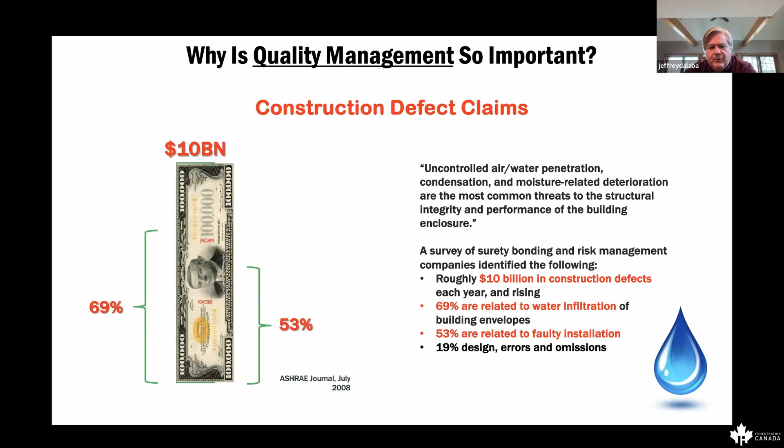The interesting thing is they tied 69% of those claims to water infiltration, and further broke that down to show 53% are related to faulty installations. Now, we're talking about the whole building envelope—above grade and below grade—so not all those water infiltration issues are specific to glazing. But it certainly points to the importance of glazing systems as a significant component of the building envelope.

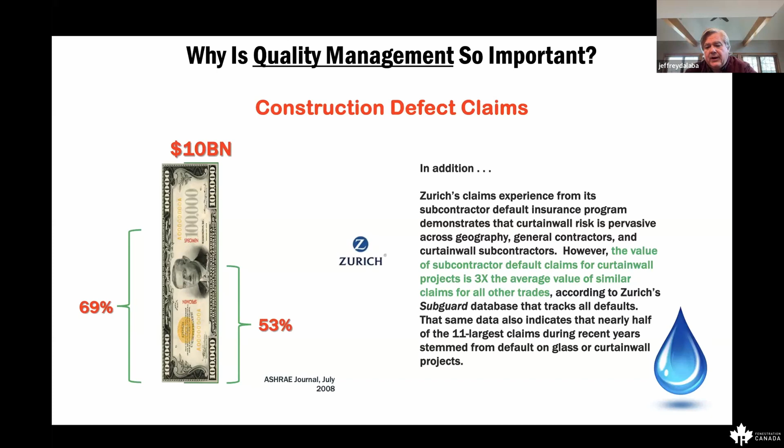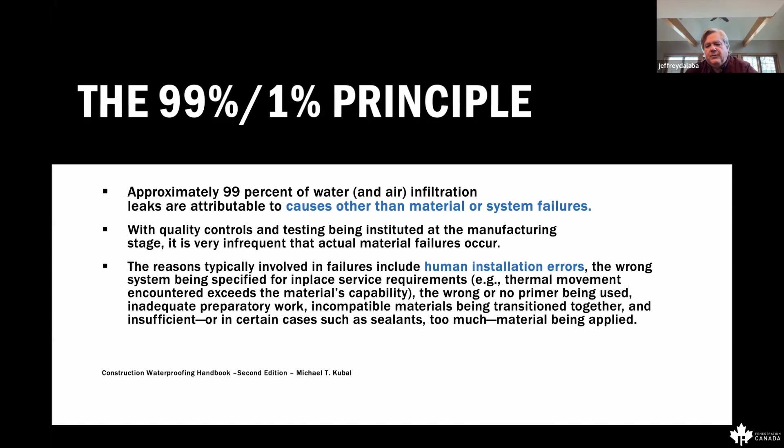So then we take a look at the waterproofing handbook, which is a handbook for building envelope as a whole and waterproofing. In the waterproofing manual, it talks about the 99%, 1% principle—approximately 99% of water infiltration leaks are attributable to causes other than material or system failures. Not to say a system won't fail, but it's more likely that human installation errors either cause or contribute to that failure than the system failing itself.

So what we've tried to drive towards through both certification of glaziers, but also evaluating entire glazing contractor firms, is to determine if there is a qualified installation team in place. In other words, to provide the best possible outcome on building envelope, there has to be a qualified team working on the project, from key management to estimators and project managers, to assembly and fabrication done in the shop, the way materials are handled, getting to the field, and final field installation.

To date, there really hasn't been significant verifiable qualifications to evaluate a contractor. So bringing in the NACC program along with AGMT has been a way to first set a standard for a qualified team, but also determine a means of evaluating them.

Going back to this again, we started with certifying products, and there's a lot of engineering and architectural testing that goes into any building envelope products. The next step, if you're going to try and control processes, is to look at the glazing subcontractor.

How do we look at the glazing subcontractor? We have to look at their process controls. Do they have qualified people following specific written processes that are industry best practices, and are they carrying them out? And then, of course, glazier competency.

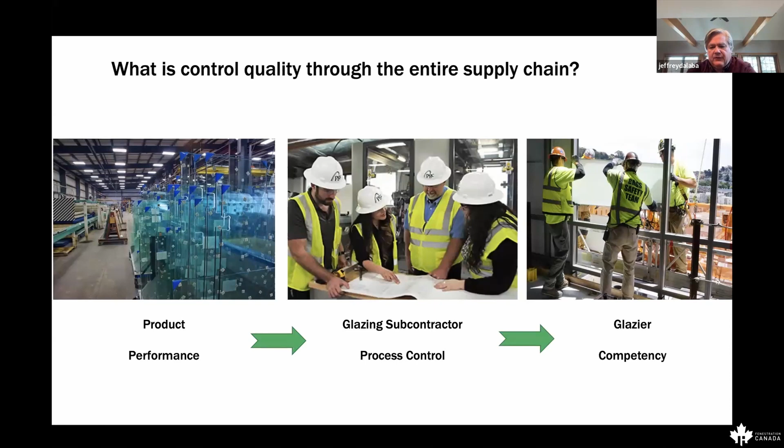Better building envelope relies on a lot of things. I know all of you on this call are involved in the industry and probably know these already, but it really drives towards minimizing air and moisture infiltration, making sure thermal isolation features are installed properly, adherence to solar shading and heat gain requirements, and durability of products like insulating glass, which can be affected by poor installation.

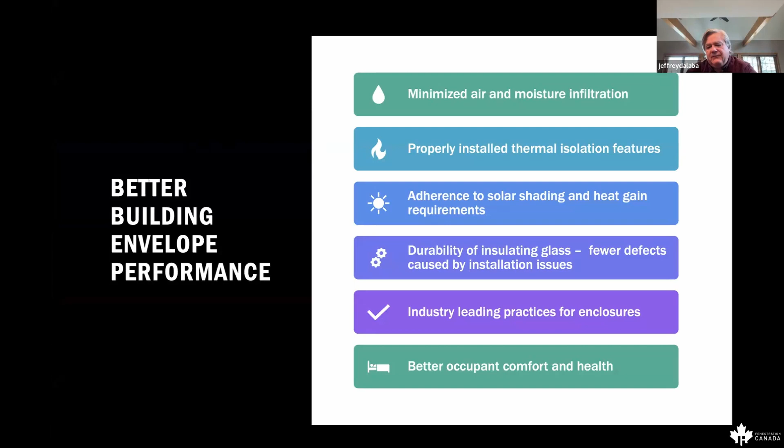It really drives towards industry-leading practices for enclosure and ultimately for general public safety and better occupant health and comfort. There are a lot of different reasons why a building envelope may not perform as expected: design flaws, construction defects, poor workmanship, installation failures, system and product failures, or repair and maintenance after installation that does not occur.

The other piece that has to be appreciated with building envelope, especially in metropolitan areas, is that a failed glazing system can be extremely costly and incredibly disruptive to occupants within the building to repair. If you have to take the skin off an entire floor of a building because it was installed incorrectly, or there was an issue with it, it's going to require moving out of the building, moving systems, and a lot of disruption to the company that's there.

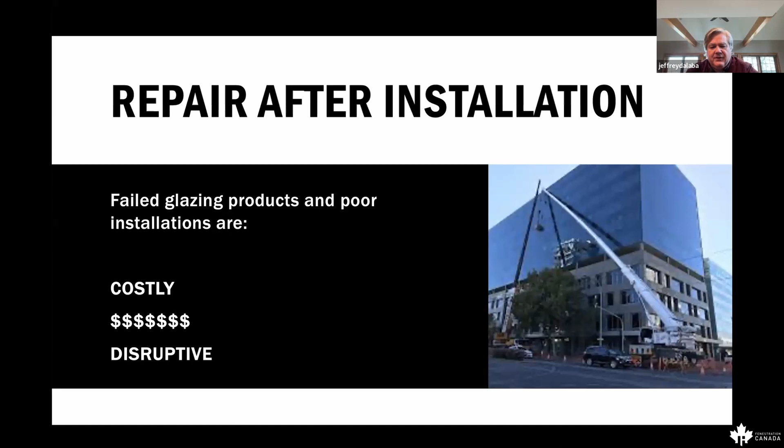So I think, to look at this a little more closely, I want to look at quality management systems and what that really means. A lot of times there's the thought process of, well, we check our work, or our superintendent looks at everything, so we have quality controls in place. But I want to expand on what we really mean by quality controls and what we're driving to through certification to ISO type systems. A definition of QMS, or quality management systems - I'm going to just read this.

A quality management system is a collection of business processes focused on consistently meeting customer requirements, enhancing their satisfaction through quality standards. It is aligned with an organization's purpose and strategic direction.

So I want to focus on that for a minute and say, what we're talking about is a company developing their systems with assistance through certification and through some of the direction of the requirements of certification and samples and examples that we provide. We don't go into a company and try to tell them how to do business, or try to completely and radically change the way that they do business. What we're looking for is for them to tighten up controls, tighten up written processes, tighten up the way that they conduct business and the way that fabrication and installation occurs.

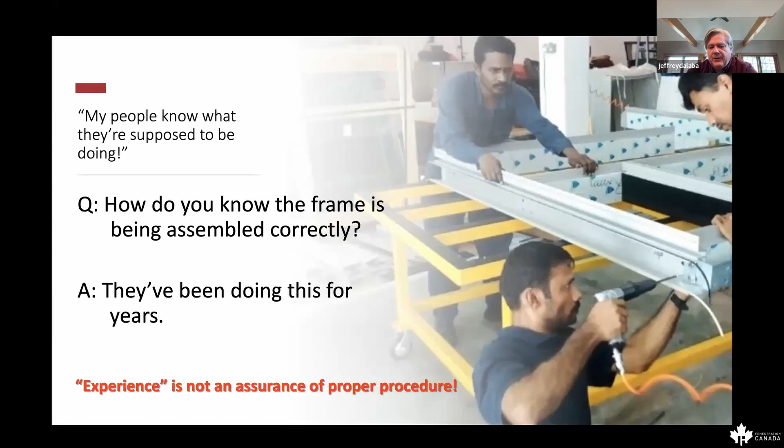Quality management systems isn't any one thing. The other thing we hear is, well, we have a quality manual. The quality manual may be sitting on the shelf collecting dust, and we certainly want to see that they have a quality manual, but it's not the most important piece. Having policies, procedures, processes, and verifications or quality checks are what bridge the gap and bring this all together. The quality manual sets the high-level processes to bring this all together.

But there's other pieces to it as well. When something doesn't go right, having corrective actions and preventative actions that are documented, looking for root causes so that things don't happen the same way twice. If something goes wrong, being able to correct it so it doesn't happen again. Of course, competent people and looking at what your customers are saying are important pieces of quality and need to be tied in. Having a quality manager that oversees the whole process and calibrated equipment - they're all pieces, they're all tied together through that quality manual, but there's a lot more to it. And that's why it's called a management system, not just a control.

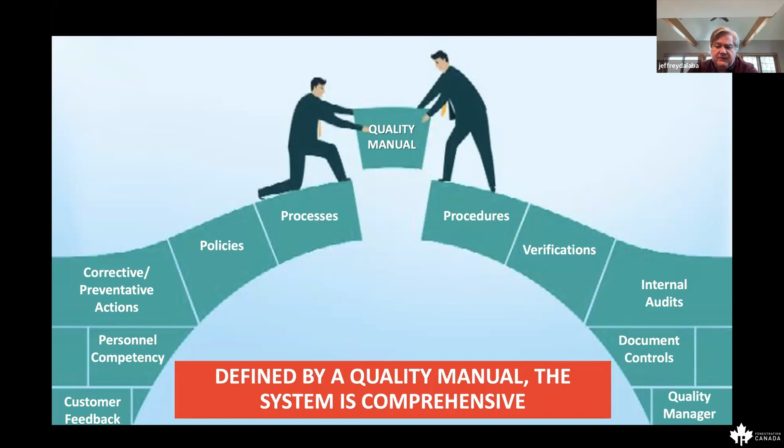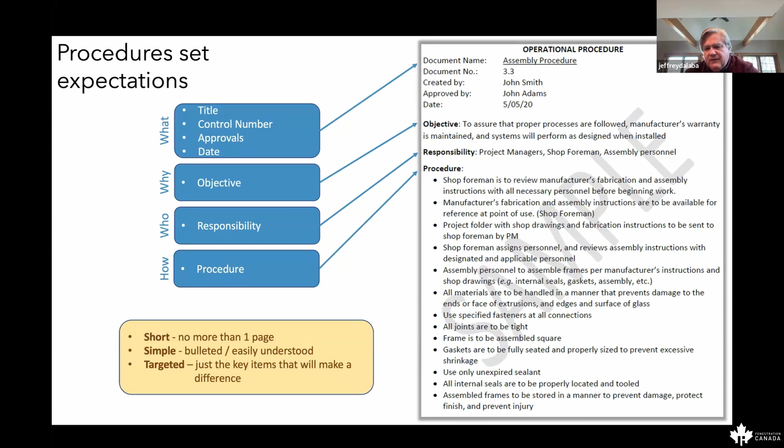We very strongly believe, as part of this certification, that you don't need 50-page procedures for most operations. Having a one-page procedure that covers at least the high-level points, and covers areas where something may go wrong or may not be done correctly, or a step might be missed - but covering those steps in a controlled process with a numbered document, with approvals and reviews of the document by management, is a way to start setting procedures for the organization. And this is just an example of what a procedure might look like.

Why is quality management systems so important? Well, this is an example here, and one of the things you may note very quickly is that the perimeter joint is tight, or there is basically no perimeter joint on this particular installation. We see this a lot of times. System manufacturers will tell you that 95% of field visits are necessitated by installers not following fabrication installation instructions. So if you look at this more closely, the bottom sill receptor is tight against the substrate with the top of the sill flashing.

There's no dynamic joint in there to allow for expansion and contraction. We see these kinds of things all the time. It's simply not following - there's two pieces to it. One is not being competent, and another piece is not following manufacturer's installation instructions that require a perimeter joint that's 3/8 of an inch in this particular instance. And that allows for the sealant to stretch and contract as well, especially important in northern areas where we get 80 or 90 degrees in the summertime and down to 0 degrees in the wintertime, or whatever. I guess I'm talking in Fahrenheit - I should clarify that.

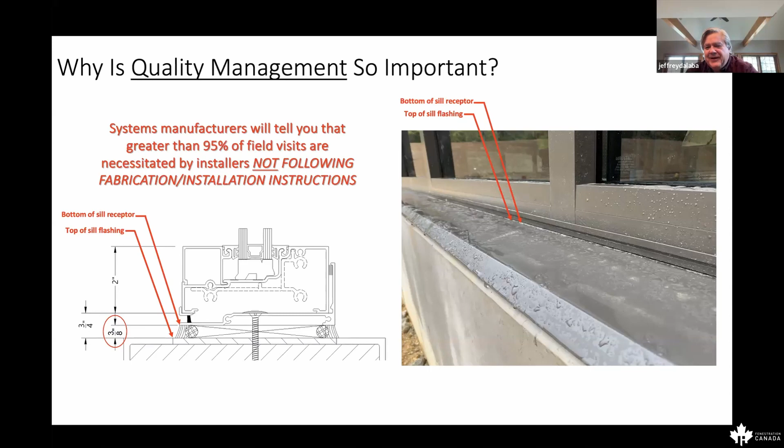Here's another example. This is simply not understanding systems, not following directions. This is a modified unit, and what we're looking at here is a cross section of it. This is a thermally broken unit, and you can see the thermal breaks in the extrusions. But then when you look at the sill, it's solid. So in this particular instance, this was a correction that had to be put in place. The sill was actually bridging the gap and preventing any thermal isolation.

And they were getting so much condensation on this unit that it was running down and onto the floor. So if you can see off the left-hand side, they basically had to build a trough on each of these units in order to capture that condensation. They couldn't get rid of it at this point without completely uninstalling and replacing the entire system. So they had to build a trough, which then captured water on the inside after it ran down, and then directed it back out and weeped out of the system.

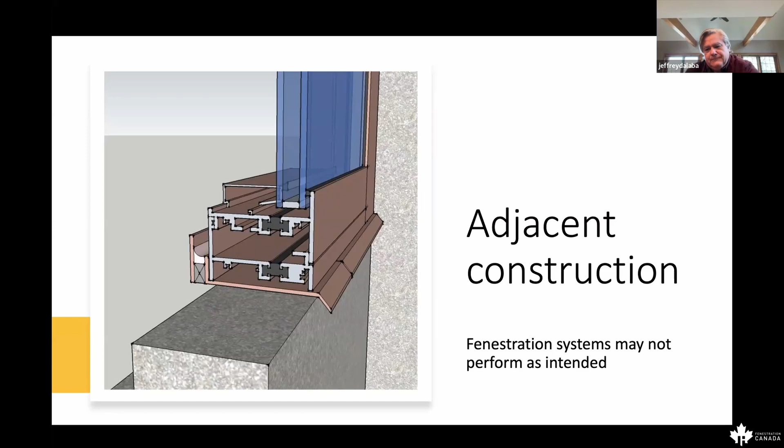So, quality management systems help to identify issues. It's a managerial tool. It involves the entire team. It's designed to be proactive and prevent defects: planned and systematic, documented processes, and preventing defects with a focus on processes and controls.

Now, quality control is a piece of quality management systems, and a very important piece. We call it quality checks, quality control, or verifications. And that is a corrective tool. So that's looking at installed work or work that's been completed and involves an inspector. It's very reactive, which is helpful, but doesn't prevent issues in the first place.

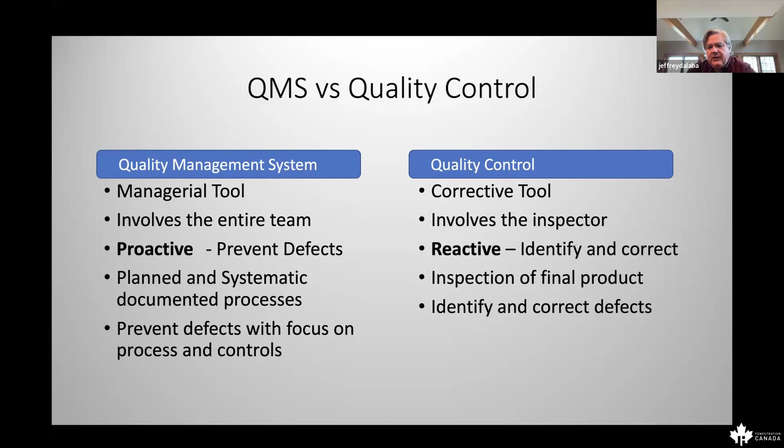Basically, what you're doing is going back and inspecting the final product and trying to identify and correct deficiencies that have already been installed, versus quality management systems, which is what we're driving to, in order to prevent things from happening incorrectly in the first place and reducing defects.

One of our contractors on the West Coast put this very eloquently. He said, "We spent significant resources fixing problems in the past that could have been avoided by putting quality management systems in place." And I'll paraphrase. Basically, they prevented the problems from happening up front, and were able to change the way that they do business by putting quality management systems into their operation.

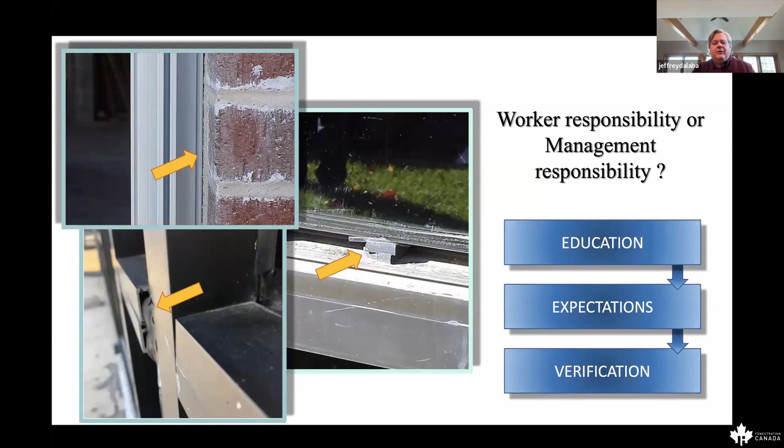And then there's that question of, well, if we have trained glaziers, or glaziers that are red seal, or glaziers that know what they're doing, they've been through apprenticeship programs, these kinds of things shouldn't happen. We've been on all kinds of job sites and we see all kinds of things. We've seen setting blocks that are substituted. Actually, we saw popsicle sticks used as setting blocks at one point, which once they deteriorate, they're no longer setting blocks. Perimeter joints, which we've talked about. Shear blocks not installed correctly.

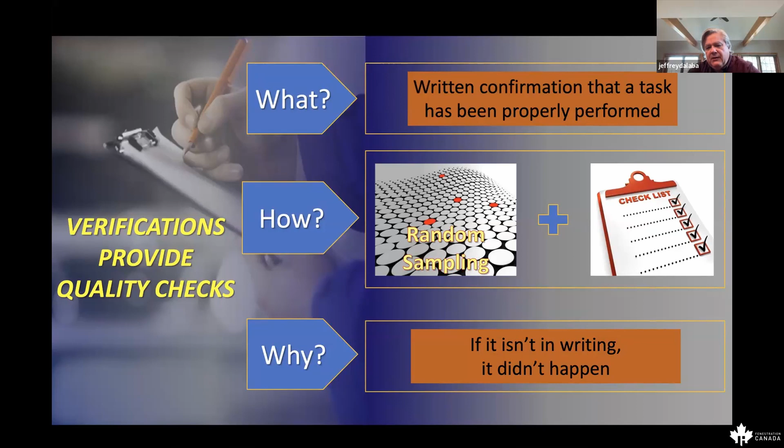So verifications provide quality checks. So how do we go back and inspect along with procedures and processes? We call it verifications, and really what we're looking at is the what, how, and why. It can be random sampling along with a specific checklist that's created within the organization in order to go back and look at the specifics of areas where problems or failures may occur later.

So let me just talk a little bit about some examples. We've all flown, and for the last 4 generations, the aviation industry has used checklists. Basically, from the early days of significant commercial aviation, the pilots have used checklists, the ground crews have used checklists, and the intent of that is to catch mental flaws inherent to all of us, flaws where it just requires attention and thoroughness in order to make sure that they're not missed.

I pulled this actually from a book by Atul Gawande, an endocrine surgeon at Brigham and Women's Hospital in Boston. He wrote a book called The Checklist Manifesto. And he does talk about the airline industry quite heavily in that, but he also talks about surgery in general. Would you want a surgeon going in and opening you up without following some type of a procedure, or without having a checklist to make sure they didn't leave the sponge or the tool inside?

So checklists can be very important, and they shouldn't be limited to just airline industries or hospitals. There's certainly a place for them in every kind of business, especially in glazing where there's a high risk of failures.

Verifications and quality checks tell supervisors what to look for. They tell everyone that quality is important. It really drives the workers to be more apt to elevate their performance. When you know somebody's going to check it, you're more likely to take a couple extra steps and look over your work and not rush.

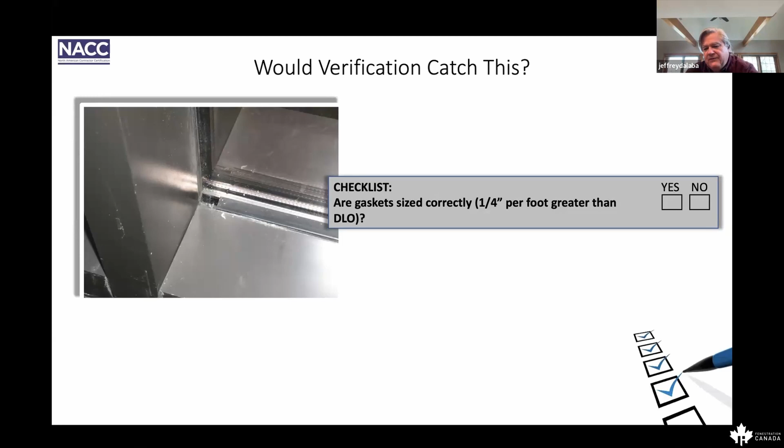What does that mean? That means the foreman, when he does the checklist, goes back, he actually pulls out gaskets and verifies that they're doing them right. Not every gasket, but lot samples to make sure that they are following processes.

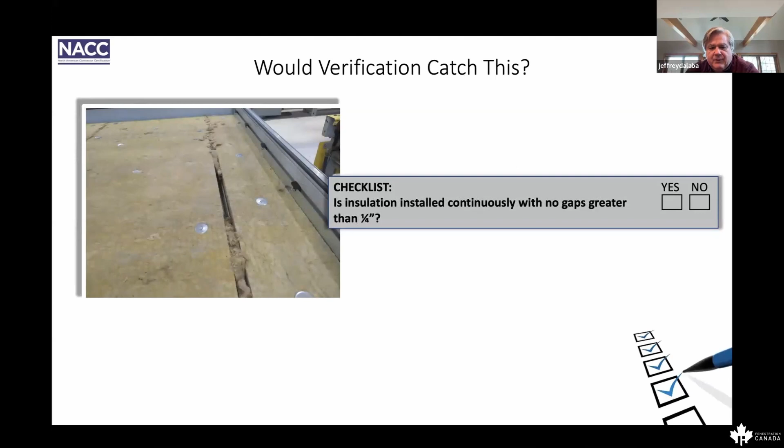On a backer pan, is insulation installed continuously with no gaps greater than 1/4 of an inch? There's an example where the insulation was installed, but there was a gap left, which reduces the efficiency and can cause condensation issues internal to the backer pan later.

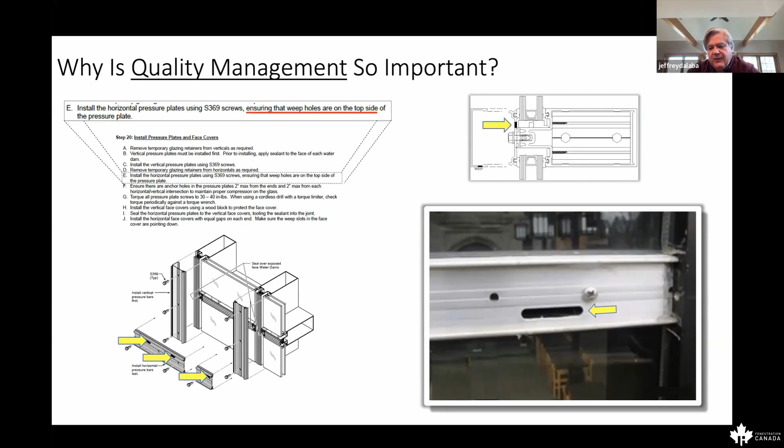When things do go wrong, we want to look at the what, where, why, how, and basically find root causes. So part of quality management systems that we require also is to have a corrective action and preventative action process in place. That means that rather than just correcting things, they're actually documented. And then they also document the root cause and eliminate that root cause for future processes.

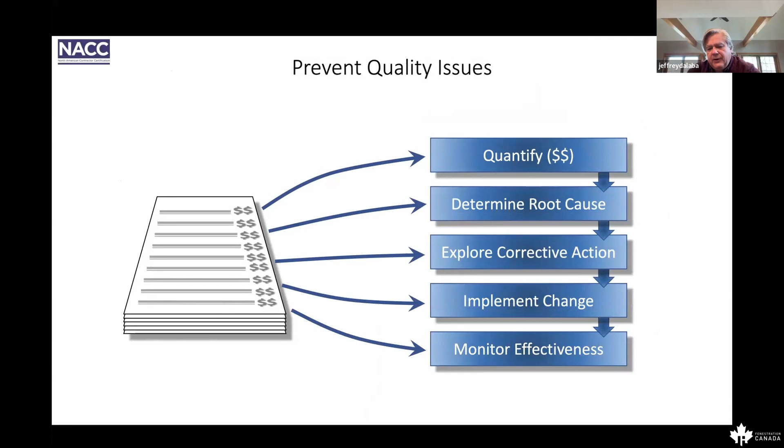It starts out by quantifying how much money was lost by doing this. That helps to put importance on it. Determining the root cause itself, exploring different corrective actions or ways to prevent this in the future, and then implementing changes within the organization in order to make sure that quality improves. And then there's also the important piece of going back, generally on an annual basis, and doing an audit to make sure that you're monitoring the effectiveness of the corrective actions that have been put in place.

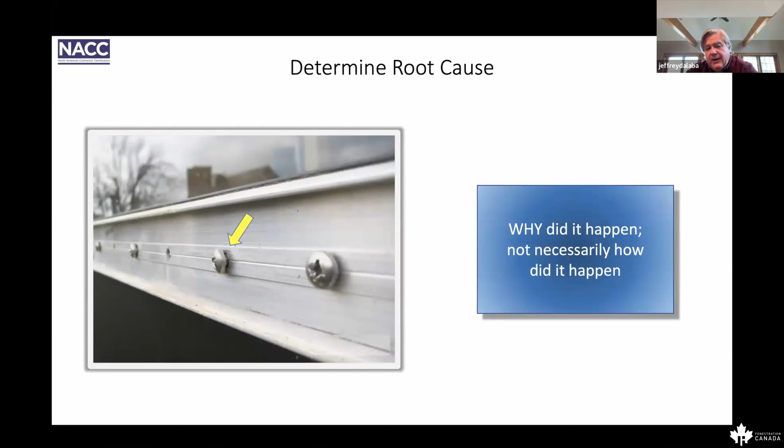Here's another example, another pressure bar here. But if you look at this, you can see where the arrow is, that this fastener appears not to be tightened down correctly. So here's how the discussion might go in that situation. The general contractor says, what happened or how did that happen? And they look at it and they say, well, yeah, the glazier didn't tighten down the fasteners enough.

We dug into this more, and looking at this deeper, it was actually that they substituted fasteners. They were too long, so they were bottoming out and couldn't be tightened. They were actually torqued down, but because they were bottoming out, they were substituted fasteners. The pressure bars wobbled and wouldn't have created any pressure to seal.

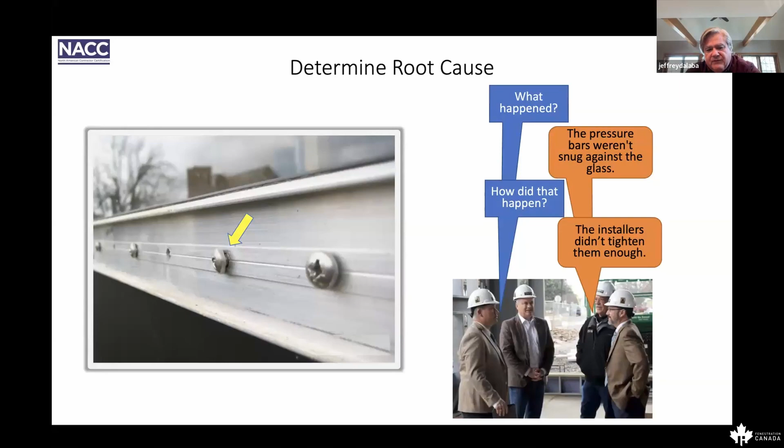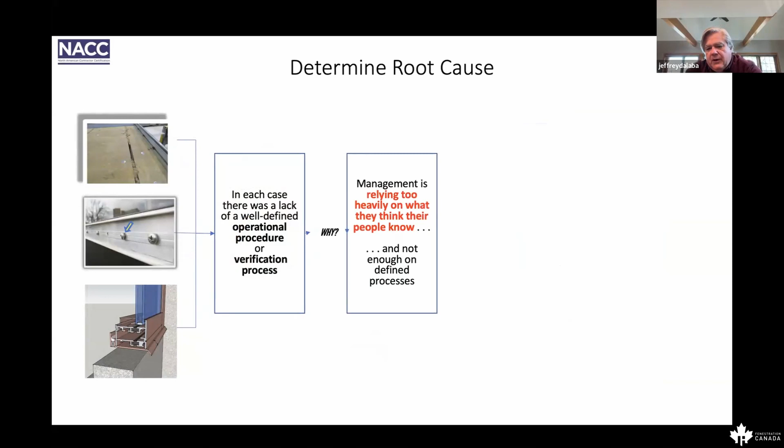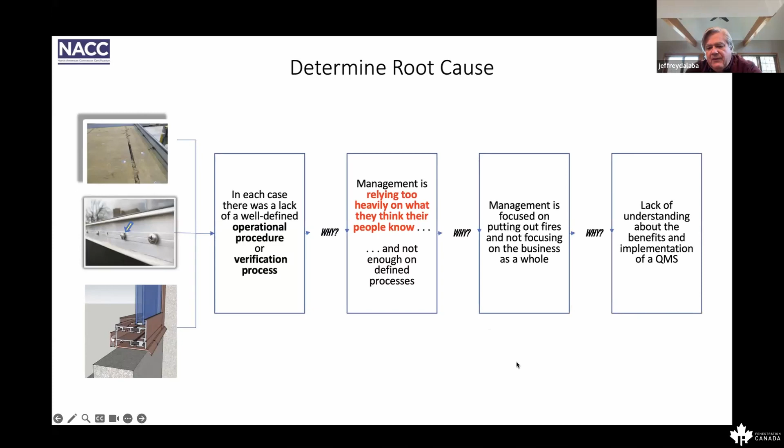But in each of these cases, there's a lack of a well-defined operational procedure or verification process. In each of the examples I showed you, management relies too heavily on what they think their people know. Again, the people, the process, and not enough on defined processes. Management is focused on putting out fires in a lot of cases and not focusing on the business as a whole. And then they're not looking for the whys of why this happened and correcting the issue.

So we say trust but verify. You certainly want to trust your people, and we want to trust the contractors, but it does require verification. Proven products, along with quality subcontractors, quality systems, competent installers, and then where we come in is an independent third-party assessment. Another set of eyes coming in to verify that quality management systems are being followed.

Now I'm going to talk about the certifications and really their mission. Now that we've laid some groundwork for quality management systems, which is certainly a key component for these programs operating correctly. The first is for glazing contractors, the NACC program, and for glaziers, the AGMT program. These programs are up and rolling well in the US, not as well in Canada. And I think we have a lot of room to grow, and I think it's important, with the Fenestration Canada organization helping us to get the word out and helping to drive towards higher quality of projects in Canada, we can start to move the needle.

Currently on the NACC contractor side, we have 70 contractors that have been certified. Of those 70, 68 are in the US and 2 are in Canada. The 2 that are in Canada are Ferguson Neudorf Glass in the Niagara Falls area, and Verval, which is in the Ottawa capital area of Canada.

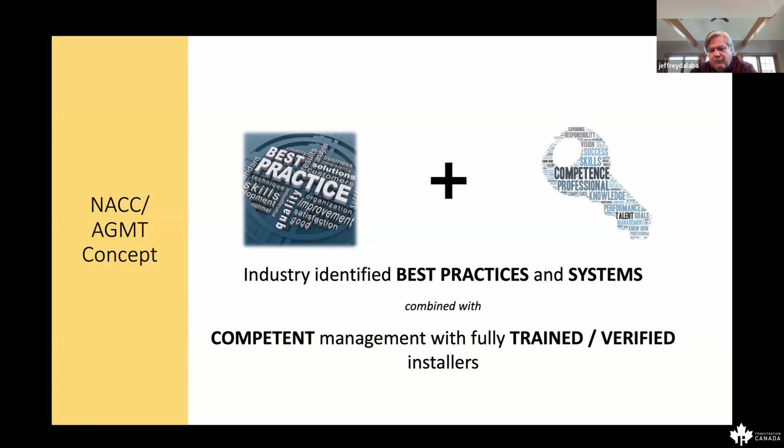The NACC program is handled through inspections or assessments. In the past, we've used the term audits. That does seem to scare some people, but we use the term assessments. And what we look for is we're going out and we're assessing to verify that industry identified best practices and systems are in place. We also look at competency of management, ongoing training that's occurring at the estimator and project manager level, and then trained and verified installers as well.

So the first thing is business practices. That's really to make sure that the company is a legitimate business. They have the right insurance coverages in place. They can bond to the capacity of their WIP. They have workers' comp in place. They have technical staff and ownership that have been in place and are competent.

We look at safety. Do they have a written safety program that they're following? Do they have a qualified safety manager? Do they have their tickets in place? Are they following in compliance with what they say they do? Do they have glazing specific safety requirements in place that they're following?

Contract administrative processes, that's how estimating and project management work to establish a job from the point of bidding on a job and looking at contract requirements to how they carry it out through project management. And then the last 2 pieces, quality and glazing processes, are what I kind of laid the groundwork for today.

And that's looking at the quality management system that's in place, a fully implemented quality management system, and then carrying out verifications and following the processes and process controls in the glazing area, both in the shop as well as in the field.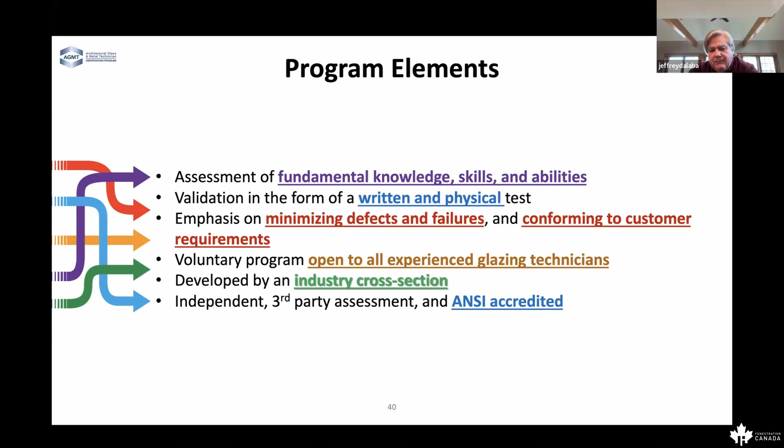We had to lay out a glazier body of knowledge. The initial body of knowledge we laid out was actually much larger than this. We had to scope it down so that we could focus on the knowledge, skills, and abilities required for installing storefront, installing curtain wall, dealing with sealant, dealing with gaskets, being able to operate the tools of the trade, understanding documents and drawings and layout, glazing specific math, and glazing theory.

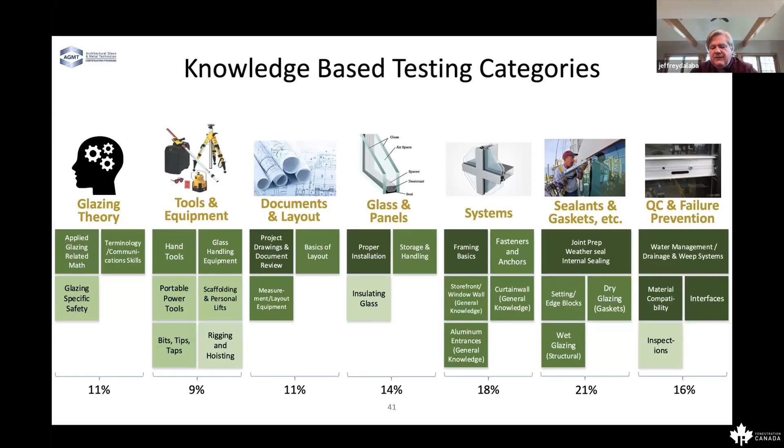So we laid out this glazier body of knowledge, and then we created tests that tie to this. A glazier has to go through a 125 question, 2-hour multiple choice exam. And where this really separates is through the hands-on tests. We have test rigs that we ship all over North America.

The physical tests include a curtain wall test where they have to stick build curtain wall, and then it simulates 3 stories. They have to get all the anchoring correct. They've got to lay out the project, start from a benchmark, and install all the glass and gaskets, and make sure that everything is done correctly.

And then a storefront, an entrance, we're dealing with a 3070 door, basic storefront system, and we put a knee wall condition in this. The knee wall condition really tests whether they understand how to level the flashing and sill pan and get everything correct, and caulk into the ceiling or ceiling pockets to make sure there's not going to be any water dripping down through, and lay this all out correctly. So it really tests the glazier's knowledge by doing that.

We also have, not pictured here, a weather sealing and structural sealing test. They have to deal with a 90-degree angle and tapered joints, install correct backer rod, and select different sizes to deal with the tapered joint and install the sealant. Then we measure the sealant to make sure it's installed at the proper ratio to get that 2:1 ratio, allowing the sealant to stretch and contract. On structural sealing, we also make sure they understand how to structurally seal without bubbles and gaps.

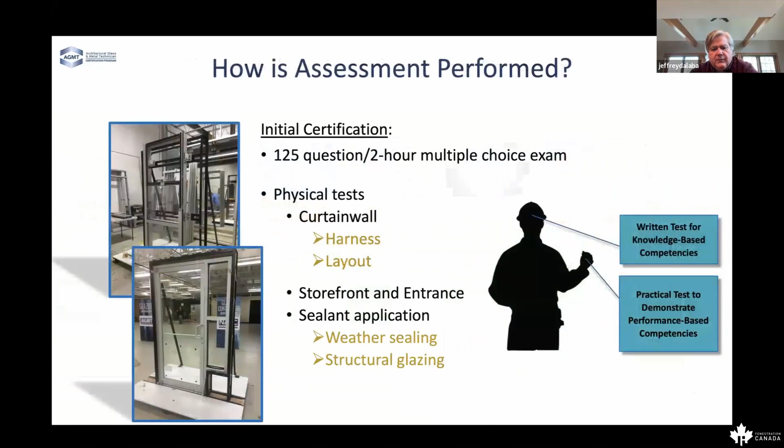These programs have been added to MasterSpec, which really drives specifications in the US. We definitely need some help in Canada as well on specifications. But in the US, prior to having these programs in place, most specifications said, as far as installer qualifications, trained and approved by the manufacturer. Some would specify a number of years in business, some would specify completed similar projects, but basically everything was subjective. What is a similar project these days? Do you really see any two buildings that are truly similar? And what does 5 years in business mean?

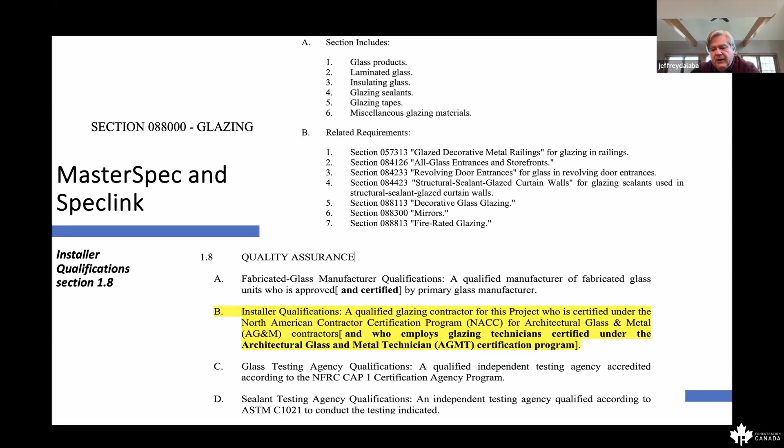So having an ANSI accredited certification that can be called out in specifications is a way to significantly upgrade the requirements for glazing contractors and really help drive towards better projects in the industry.

Both programs are ANSI accredited, or accredited through ANAB, formerly known as ANSI, which provides a roadmap for a gold standard certification. It provides oversight of us as a certification body, provides accountability. They go on audits with us. They go out on the job sites with us. The ANSI auditors do. This protects the certified participants by making sure there's consistency and impartiality.

And it really is a differentiator. Anybody could build a program and call it a certification program or provide a certificate. But when you're going through ANSI requirements and following ANSI guidelines to ISO standards, like ISO 17065 for the NACC program, or ISO IEC 17024 for personnel certification for the AGMT program, it provides a gold standard and a path to run on.

That's all I have. I'd like to ask for any questions or anything from the audience. One question that I really have is, why has Canada been so slow to adopt this North American Glazing initiative? Some of that maybe we aren't getting the word out. Some of it may be perceptions. Some of it may be, well, we already have Red Seal. So I'd really love either now, or text me, or email me, or something in the future. I'd love any thoughts that you have.